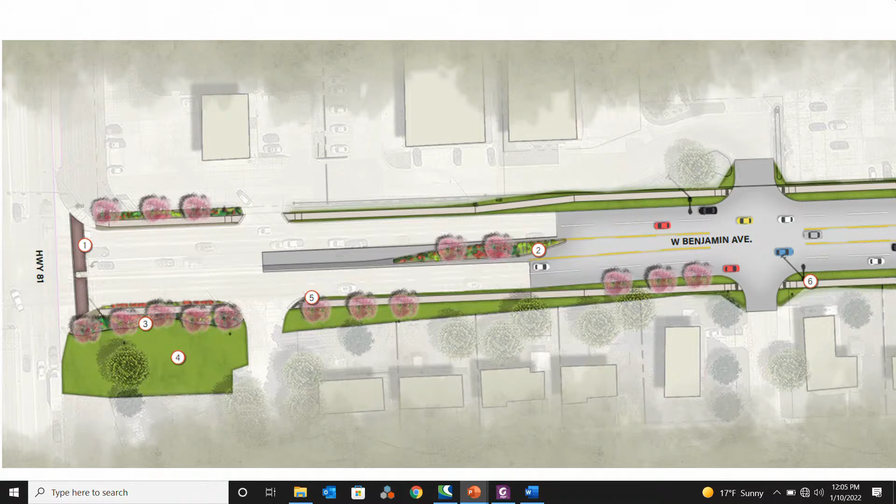So I've got about 4 images on the slides. Starting at the west end of the project, we're really focusing on about 4 areas throughout the corridor to what we call enhance the landscaping. Starting at 13th Street or Highway 81, we are looking to add some additional street trees in the area, identified by the pink color, as well as landscaping really the one raised median along the project where you can actually put some landscaping in it.

Moving east, we focused a little bit on the Queen City Boulevard area, adding some enhanced landscaping in that area, as well as some pedestrian lighting at the intersection of Queen City.

I'd say the majority of the focus of the landscaping is kind of in that area, primarily east of Riverside. It's areas where there are some large swaths of parking lot, and this will help to break up some of the large concrete areas within the project area.

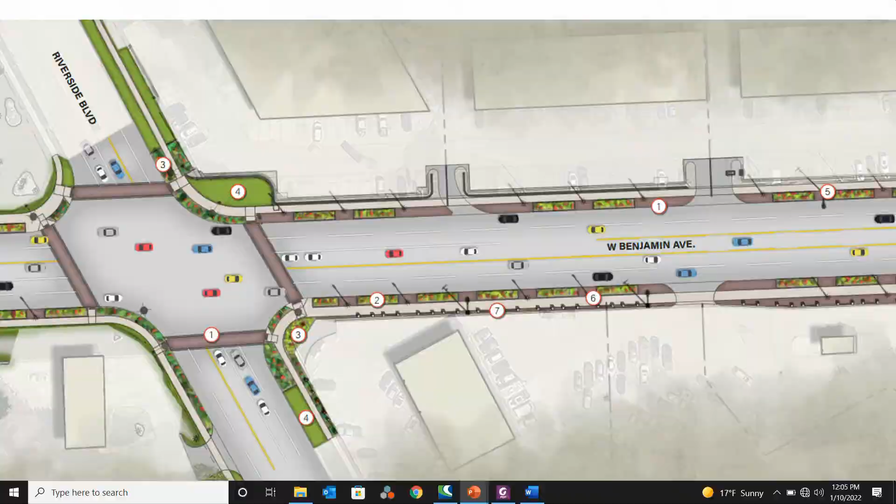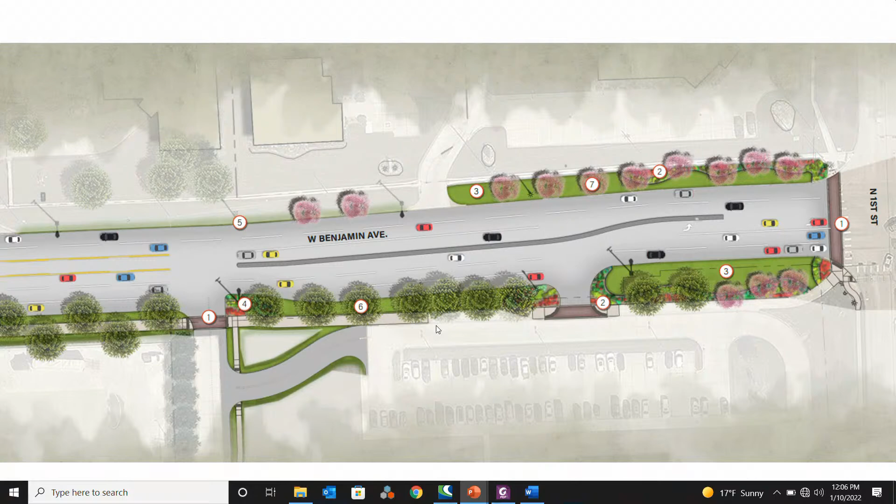I do have a rendering of this area shown here. This is kind of a graphic rendering of what this would look like when it's mature. There'd be some planter boxes, some pedestrian lighting, and some decorative concrete paving, kind of separating the street from the sidewalk. And then at the east end of the project towards First Street, we're also proposing to add some additional street trees, decorative trees in the area kind of in front of the YMCA as well as the school area.

As far as project status, where we're currently at, you've probably seen NPPD's been relocating their overhead out there. So those utility relocations will be continuing kind of over the winter months. As Steve indicated, the right-of-way is nearly complete. I think there's 3 parcels remaining. And then we're doing the final touches on the specs, specifically the dates that we're gonna put on the contractor as we move this thing forward.

I want to talk just briefly about construction phasing. This is a 2-year construction time frame, starting in '22, around April 1st is what we're predicting. Focusing west of Riverside in year 1, so really not impacting the intersection of Riverside in year 1. Year 2, so 2023, then we would do the intersection of Riverside on east to the east end of the project near First Street. Because of the Migratory Bird Act, there would need to be some trees removed prior to April 1 to adhere to that federal regulation.

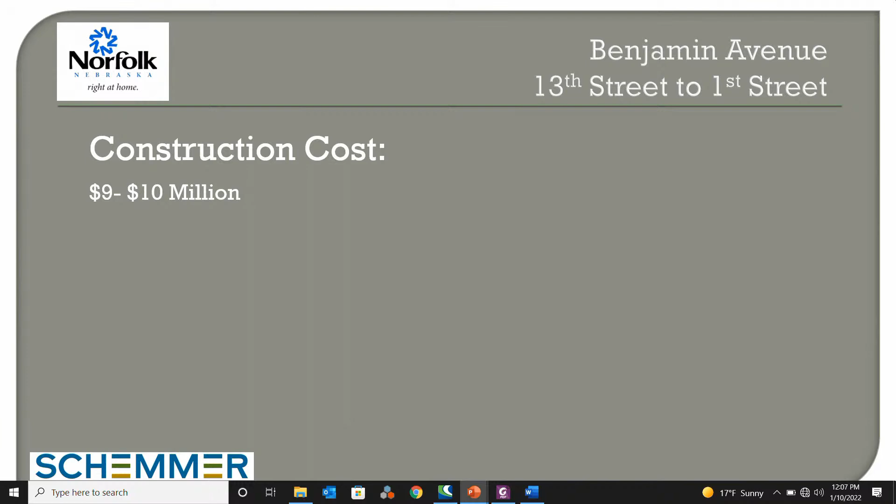Construction cost, we're estimating that $9 to $10 million range, all in with the construction cost. And got a question slide. We'll open it here shortly. I was gonna walk through graphically what the footprint of the project looks like for the group here, and then open it up to questions.

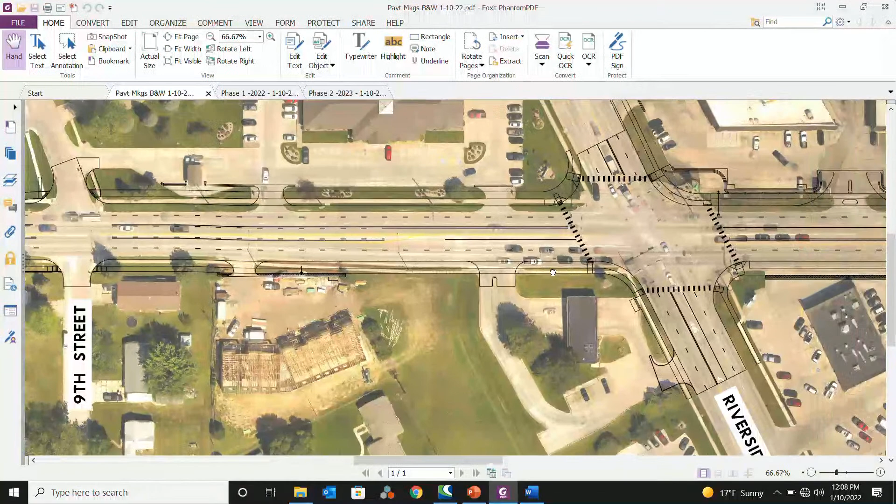So graphically, starting here at the west end at 13th Street, you can see what the pavement markings would end up looking like. It's basically a 2-way left turn lane throughout the corridor. We get to Riverside, there'll be some new crosswalks, a new traffic signal at Riverside. Continuing east, we are extending the box culvert under the old North Fork of the Elkhorn River and actually replacing the top of that culvert as well with this project, since cars are driving right on top of that structure today.

Once we get to the soccer field area, it'll be a full reconstruction on the south side, but on the north side of that area, right now we are just doing some pavement repairs. Those are kind of indicated by the rectangles on this graphic. The pavement in itself is not in terrible shape on the north side. So we're doing the pavement repairs for now in preparation for maybe a future asphalt overlay down the road.

At First Street, adding some crosswalks, updating some curb ramps, and supplementing the existing signal with some pedestrian push buttons and so forth. That's an overview of the design quickly, and I do have some slides that can talk about construction phasing during Q&A if we wanted to walk through some of that. So with that, I think we'll entertain questions.

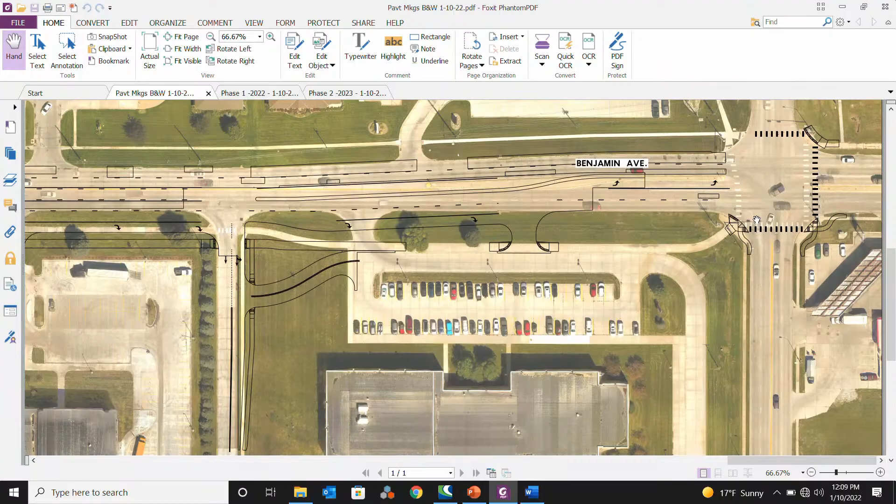When you're doing construction, you're gonna do head-to-head, one north and south, or south and then north the other way? Yeah, we will. I figured some questions would go to phasing. So this will be the 2022 construction stage. So 13th Street on the left here. As you can see, we're stopping short of Riverside with the red. So the red would indicate what's being under construction. Traffic would be shifted head-to-head to the north side of Benjamin, and then switch back prior to Riverside is what we're thinking right now. What's the green on Queen City?

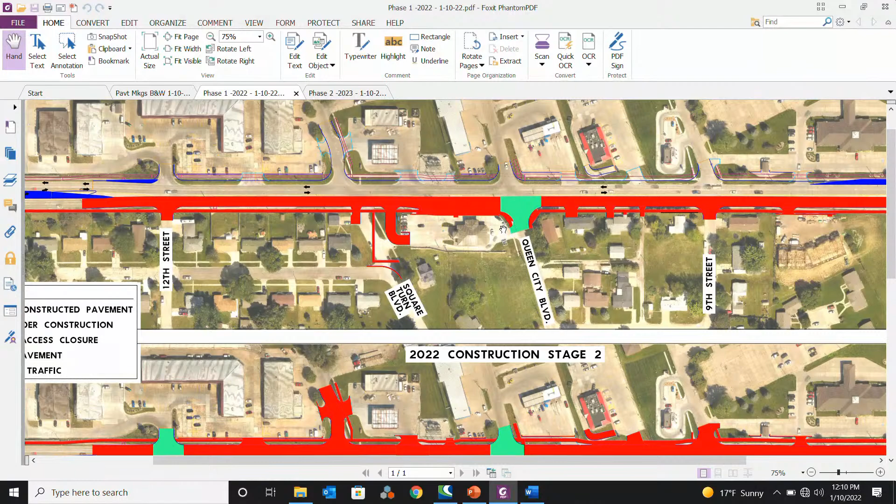The green is some areas where we're going to have to phase that intersection. So in this case, green means it would stay open temporarily while they get some of these other adjacent streets done. So for instance, get the new driveway to the pharmacy done. Once that's done, we could close Queen City and get Queen City constructed. So the green indicates kind of a phasing of that access.

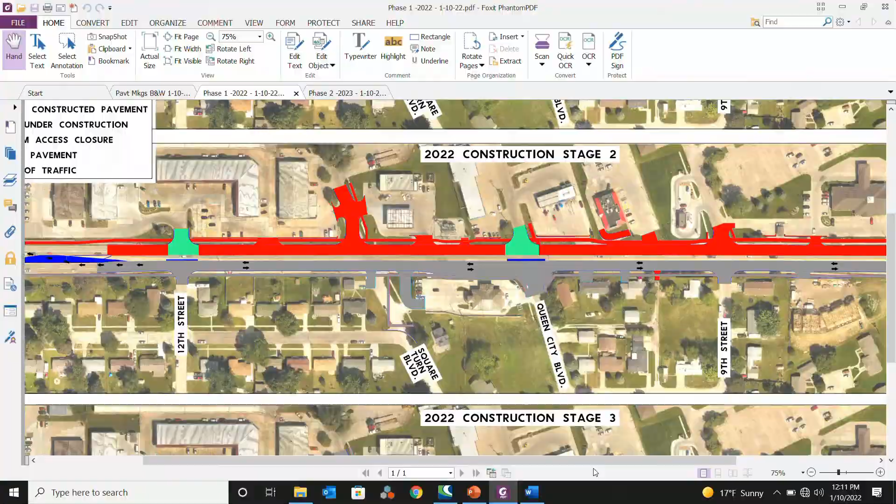On your landscaping, I know that's gonna be a separate entity, but have we talked about a budget for that? Are you looking for a landscape number? I think right now we're in kind of that $1 million range for the enhanced landscaping, which is the trees, the perennials, the pedestrian lighting, and some of the decorative concrete, the planter boxes. There is a little bit of a screening wall as well in parts of the project. Okay. And Steve, did we determine, is that the city's responsibility to maintain that?

That is the intention. I thought it was, I just want to make sure. Yeah, that conversation of the enhanced landscaping had come back to a conversation with subcommittee and some landscape folks, probably 6-8 months ago, and so that's one of the components we've been working on. And then as a function of that, we would intend to identify not just this corridor, but a couple other corridors in the community within city code as city maintained. Okay. And so that will come before us at a later date, and the idea there is either you would have some or you would not. Correct. Okay.

Doug, we saw with Braasch Avenue reconstruction recently completed here, beyond the street reconstruction, there was a lot of utility replacement under the street. I know we're dealing with some relocations here, but are we looking at, as part of this project, any utility replacements or major reconstruction of storm sewer or water? Yeah, so from a city utilities perspective, there is a fair amount of storm sewer being replaced on the project. There is a large storm sewer trunk line along predominantly the south side of Benjamin.

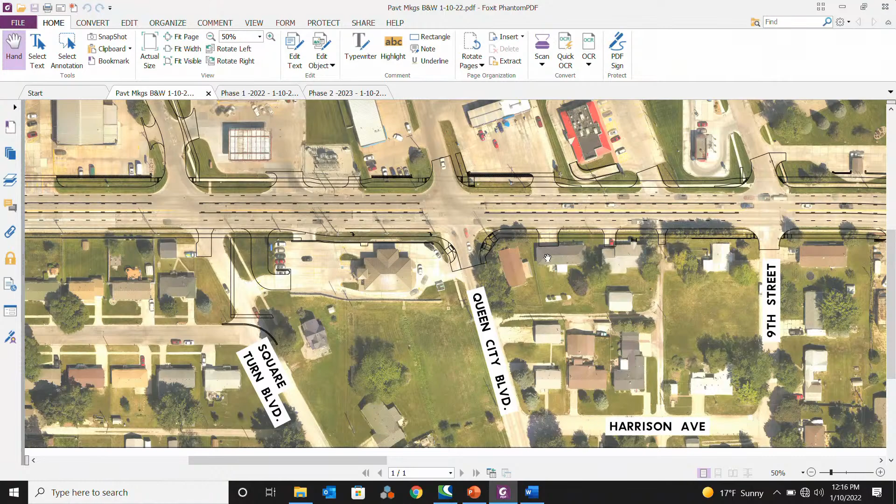On the box culvert, you extended that out on both sides, and now there'll be sidewalks across there? On both sides? That's correct. Any chance you could put a crosswalk in that area? Underneath or at grade? I don't know.

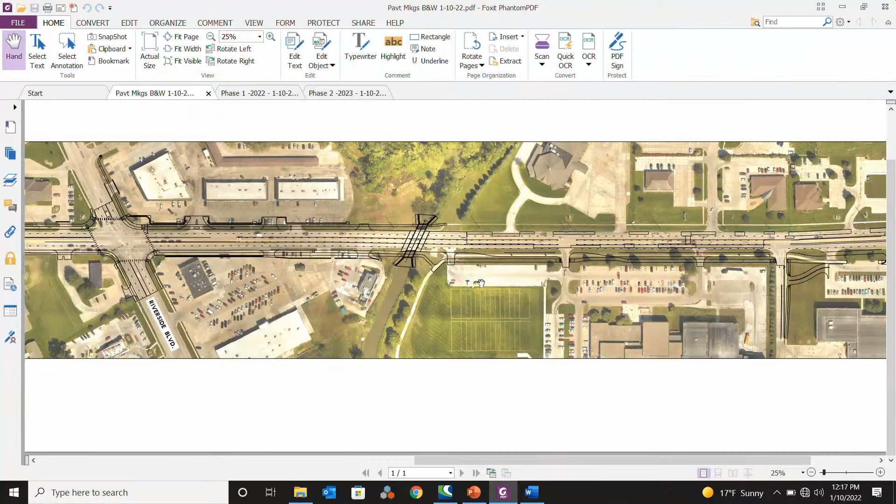I mean, I think there's always an opportunity to do that, based on the true volume of traffic on that stretch of Benjamin. I think we want to be very cautious about where and how many crossings we do for pedestrians, and really prefer them to cross at signalized intersections. The one thing, obviously, we will have some conduit in there just east of there for the potential of an RRFB, one of those rapid flashing beacon pedestrian controlled, in anticipation of increased river activity and kayaking, canoeing, potential crossings there.

Whether or not we actually do that installation at this time, we will be putting conduit in there to allow for something like an RRFB type pedestrian crossing. And that was designed, Steve, down towards the east end of the soccer fields there, was it not? Well, it would be, yeah.

Big picture, futuristically, we would anticipate the potential for an actual signalized intersection at the current YMCA entrance. Right. So in the design concept, we did look at that becoming a signalized intersection as traffic and pedestrian traffic started to warrant a signalized intersection there. That just depends on what happens at the YMCA, future development and demand at that area.

But in lieu of that being there as a signalized intersection with pedestrian crossings, having a crossing more directly east of that river bridge or the river culvert. We have crossing activity there right now, and so that is a potential, and we will be putting conduit in the ground there in anticipation of that RRFB type crossing there. Okay.

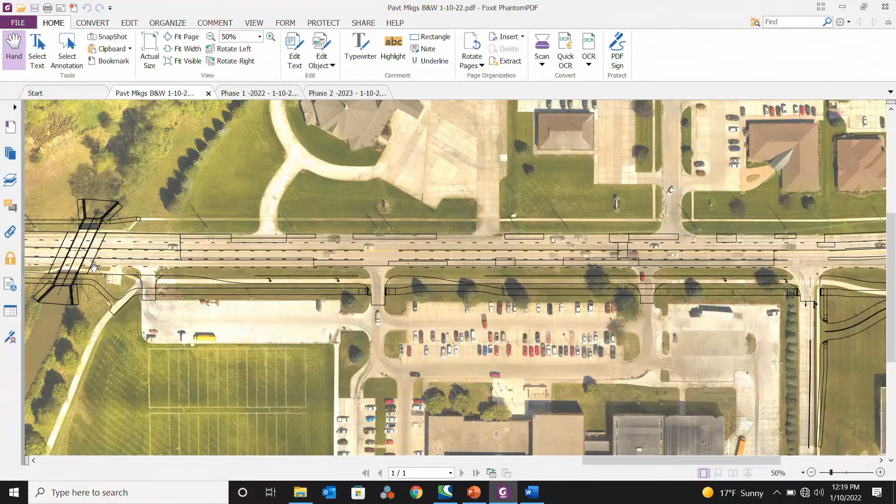Engineering-wise, things as they are, is it plausible to put a trail under the bridge? Right, a pedestrian trail. Yeah, right now it'd be a very shallow crossing. I don't have the exact headroom, but it would be a very shallow crossing for bicyclists to ride through there. Walking, maybe a little more feasible. Yeah, we don't have the headroom for a traditional bike-type crossing there. You want a minimum of 8 feet. It's recommended to have 10 feet of clearance, and we definitely don't have that.

So there will be a pedestrian crossing at Queen City, but that will not be signalized? That would not be signalized, correct. How does that work then? We'll add some pedestrian signs to sign it as you're approaching that. There's also crosswalks striped on that east leg of Queen City as well. We're only having the crossing on the east leg, not on the west leg, to really try to focus on one location for that crossing. So signage and the crosswalk pavement markings.

So with this whole project being wider, a little bigger than it is right now, is the speed limit going up, down, or remaining the same? Right now, we're projecting it to remain the same. Okay. We would definitely not be increasing its speed limit.

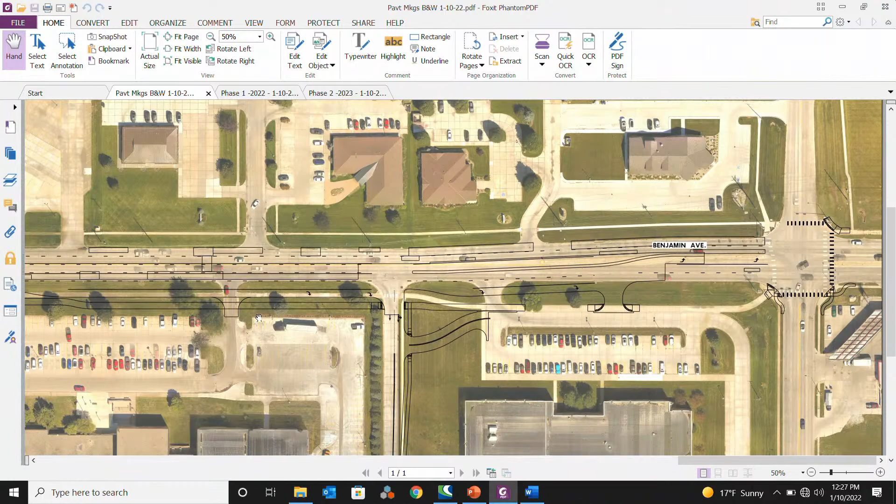North side of Benjamin across from Burger King. If you just pan over there, I just wanted to look at that quick. The entrance and exit going into the plaza, the multiple buildings on the north side of the road there. Right. My question is, why move it from the current entrance? This drive here? Yeah. Because we always want to align drives as much as possible when you have an opportunity for vehicles going eastbound or westbound to make a left turn. So by aligning them, you avoid that potential conflict of left turners turning into the opposite left turners.

In addition, that also aligns well for trucks or heavier vehicles to get in between Mr. Metalman's buildings as well. Was there consideration of doing only one access to that property rather than two? Those seem pretty close together. Yeah, originally this drive was proposed to be closed.

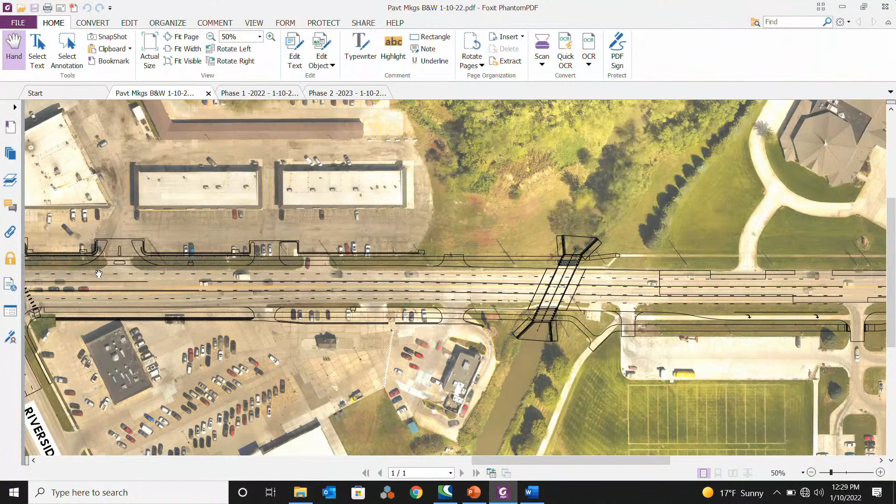There was concern about that from the property owner, and what we ended up doing is making that a right in, right out driveway to continue to provide access, but to eliminate some of the safety concerns we had about people, especially turning left out of there. That's where the majority of the crashes occur. It also helps with proximity to the traffic signal. Putting a full access drive there is definitely not recommended.

So there will be an island. There will be a kind of raised island both between the sidewalk and curb as well as behind the curb to really prevent a left turn out or a left turn into that drive. So Paul is all right with that? Mr. Metalman hasn't officially signed, but it sounds like we're pretty close on the right-of-way acquisition.

And the middle school, are they pleased with that concept? The middle school has signed, so to me, that's an indicator that they are on board with this. We did have multiple meetings with them throughout the project. Right. Thanks. All right, any other questions, council?

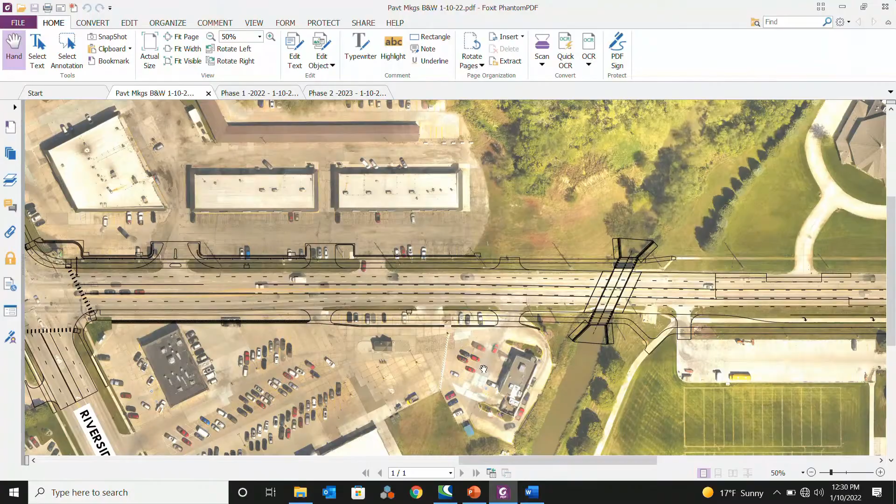I guess I just have a comment. This is a big project for us. We've been waiting a long time for this. But as we go through this process to start the actual construction of it, the big thing is gonna be communication with the businesses, the homeowners, and the citizens through the city website, through the newspaper, the radios, where we're at, what we're doing.

I just think, as a team, we need to all be on the same page, for everybody's safety, and then for the communication for people to get around the community. It's gonna be during different times of the year, schools and holidays and festivals and different things, so that people know that we're still open for business, but we'll do the best we can. And everybody's gonna be patient, because once this project is done, it's gonna be a nice investment for our community.

Well said, Councilman. And maybe that is a good segue into talking about some of the timing here. So with this action, should the council take it, we would authorize going to bid on construction. And Steve, maybe you can talk about what that means in terms of timing. When would the bid actually be let? When would we expect closing of it? And then potential construction? You have the advertising right there.

So we will be advertising this until February 17th. Put it on the bottom for me, Doug. First advertisement would hit the paper on January 20th. Last advertisement would be February 10th. Right. And go back up. There's about a week's delay in there, 2 weeks delay. We open up bids on the 17th.

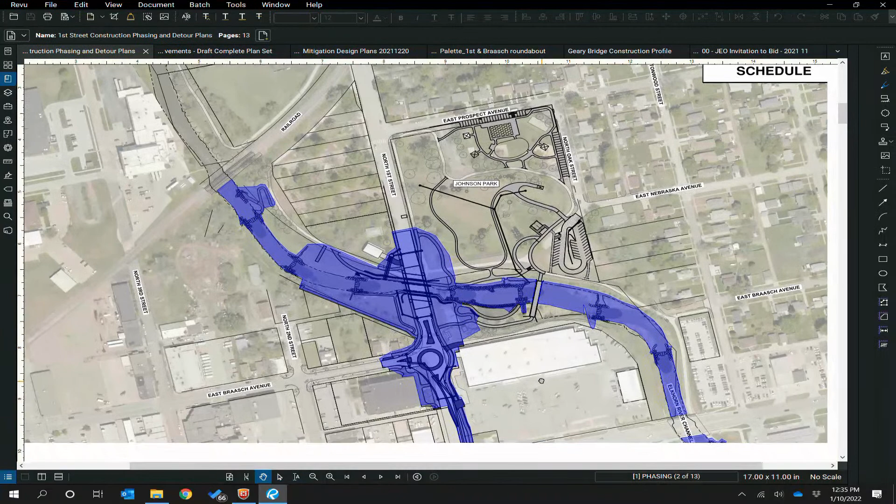The second component of the project is the replacement of the First Street Bridge across the North Fork River. As a function of that, there'll be sidewalks underneath First Street on both the north and south side of the river. So you'll be able to enjoy the trail system and cross over there without conflicting with northbound and southbound First Street traffic. Finally, the third component is some significant drainage improvements in the roundabout there at Braasch and First.

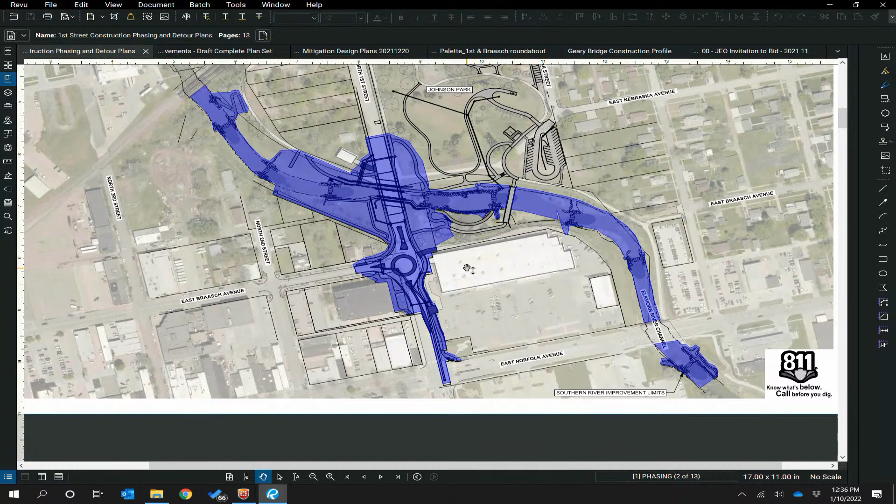And the drainage, we did a significant drainage improvement on Braasch from 4th or 5th to 1st, back when we built that a couple of years ago. But knowing that we had this work that was gonna go on, we terminated that at the west side of First Street, so we'll be extending that storm sewer system down to Norfolk Avenue and then constructing the roundabout. So those are the three components, and with that, I'll turn it over to Nathan to kind of walk you through. Sure, thank you, Stephen.

All right, so I am going to go one slide back. The reason for that is Stephen did a really good job of encapsulating all of the three various projects that are wrapped into this one that we're here primarily for discussion today. I do want to point out there are multiple other projects in this vicinity. So while this project involves those three, it's also setting the stage for future work that is planned within Johnson Park, whether it's the parking lot improvements, the restroom, grading, sidewalks, as well as future amenities, as you'll see in the green in Project 4, which would be for an amphitheater, skating rink, various amenities that the community can use for years to come.

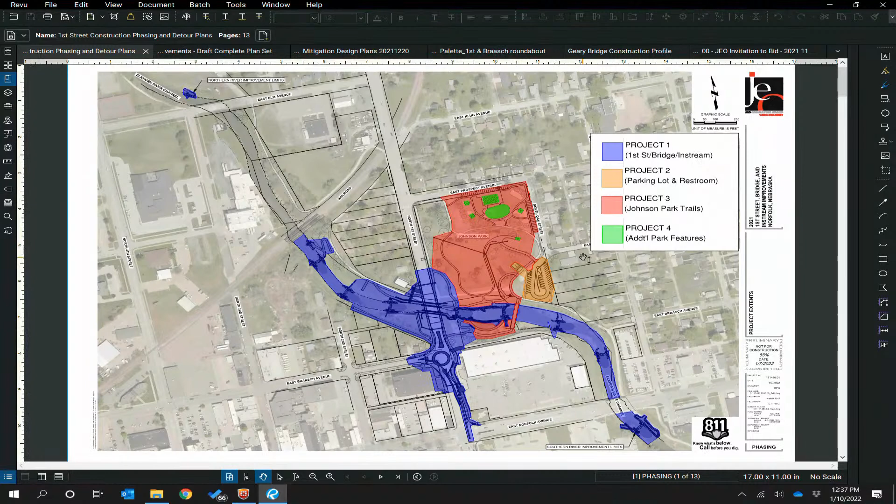So this is the only snapshot I have of all of the projects together, but you can see how they all intertwine as one massive improvement project over the next few years. So I advance to the next page. Everything in blue is really what we're talking about to be approved for advertisement today. We're calling this project 1, and within this project I'm gonna explain it in multiple phases. So phase 1, 2 through 3, if you will.

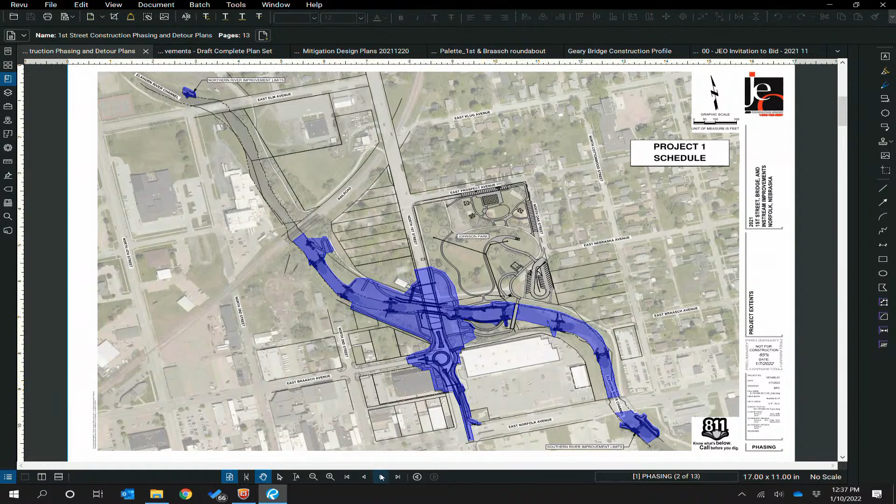Now you may ask, well, the stream or the channel is right there. Why don't we just pop in? It's a lot shorter. It'd be a lot cheaper, more cost effective. Well, we certainly looked at that, but because of the stream improvements and the water elevation within that, where the storm sewer is, it really doesn't work. The storm sewer is approximately 12 feet below the street surface as it exists today. The stream is not. It's considerably higher than that. So we'd have to put a pump in, a significant cost and maintenance effort, in order to get the storm sewer out. So we identified a really good tie-in point on East Norfolk Avenue in order to extend that. And we're going to break that up into a couple phases so we can keep Norfolk Avenue open during construction.

As well, the other item that's going to start in May, really as soon as we get notice to proceed, is removing this bridge structure. The reason this is a very critical item is that's the longest lead time of everything that we're working on here. And the reason we need to get that going first is because by the time that is removed and the contractor's done with that removal and all the structure that supports it, the stream work will be up to that point. And so we can kind of hand off from one subcontractor to another throughout this contract in order to move forward. So this is May through June of 2022.

But overall, from a schedule standpoint, Norfolk Avenue, as I mentioned, 14 calendar days for each of the subphases within that, and I'll go into detail on what the traffic plan looks like and how we plan to redirect traffic. For First and Braasch, we have the roundabout and all streets fully open to traffic as of November 1st. That's the goal we're telling the contractor. Trails and sidewalks, we want fully open December 1st of this year as well.

We do have the contract continuing on through May 31st of next year. And really that's to button up some of the seeding, the vegetation, things like that. As we get into the winter months, it just becomes too cold to put those plants and seed down and expect them to thrive throughout the winter. So final punch list items. So overall, the cost of all of this, everything that I've showed you in the blue, as well as these multiple colors here, is between $7 and $8 million for construction.

So now I can dive into a little more detail for some of these areas. So phase one, as I mentioned, is this bridge replacement. So construction duration for this segment is 6 months. So late April, early May to early November is what we're anticipating for that.

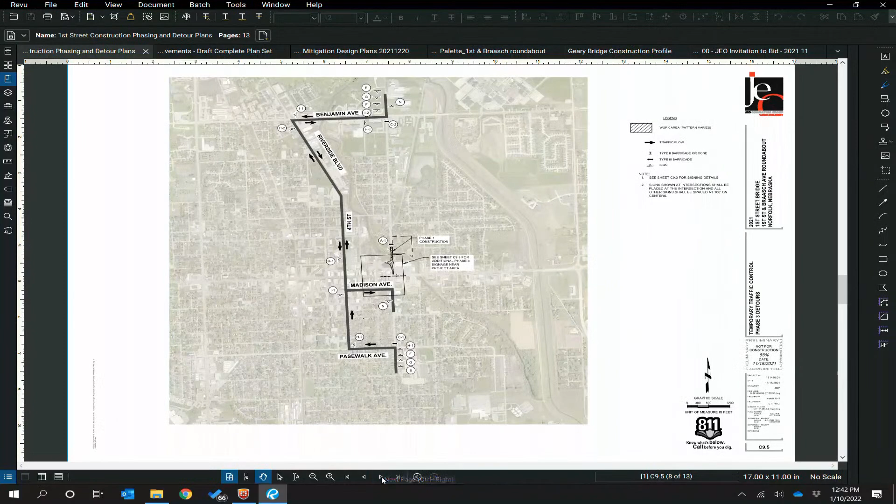And then phase 2A and 2B, this is along Norfolk Ave, storm sewer replacement, construction duration of approximately a month, so 14 days per subphase. Anticipating as soon as the contract is signed, so late April, early May through June. So this is the detour for this phase. And this is really a driver in that First Street would be fully closed in order to allow for that bridge to be removed.

So as Doug mentioned, Benjamin Avenue phase 1 for 2022 is everything west of Riverside. And the reason for that is because we really need Benjamin Avenue open east and uninhibited to allow for the detour for this project.

So detours northbound will begin on First Street, then go west on Pasewalk, then north on 4th Street to Riverside, and then to Benjamin east before continuing north again on First Street. Southbound, again, most of that in reverse, so First Street to Benjamin, to Riverside, to 4th Street, and then instead of getting to Pasewalk, we have them going to Madison Avenue. And the reason for that is to keep as much traffic as we can off of Norfolk Ave with the pedestrian numbers that are there, as well as parking, and it made more sense to redirect traffic elsewhere.

Now the locals, everyone who understands where all the street system is, they're gonna go wherever they wanna go regardless of how we sign it. So that's something that we'll have to keep in mind throughout the project to make sure we communicate with the contractor and with really just the community as a whole of this is the established detour route. But a lot of locals tend to find the route that works best for them in their situation.

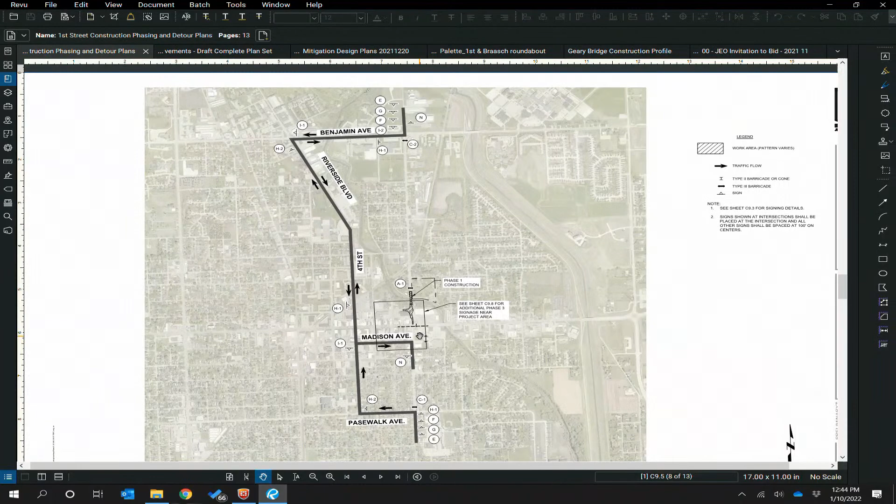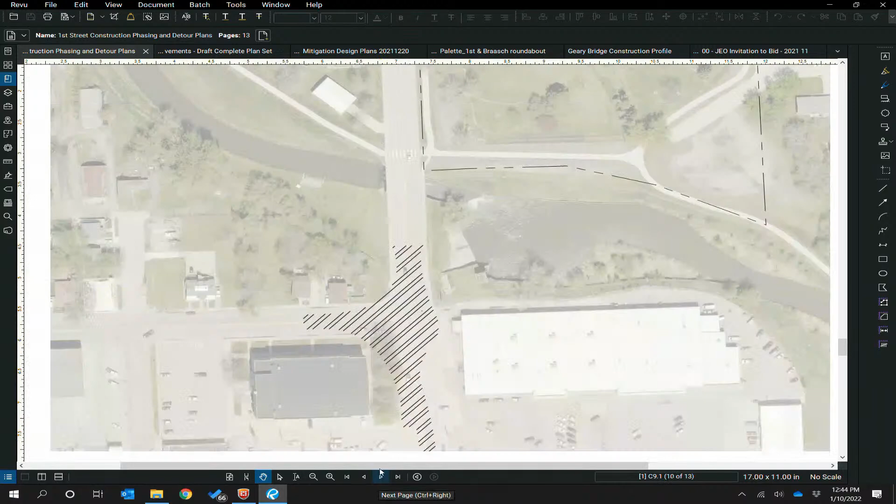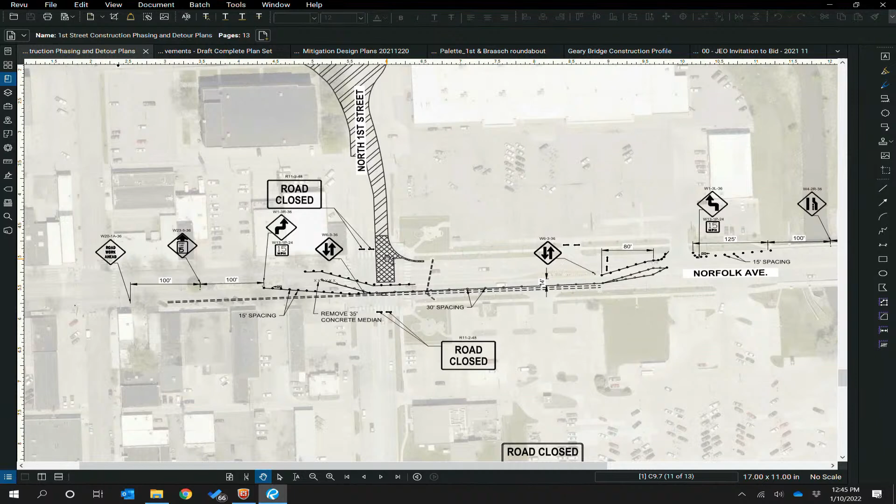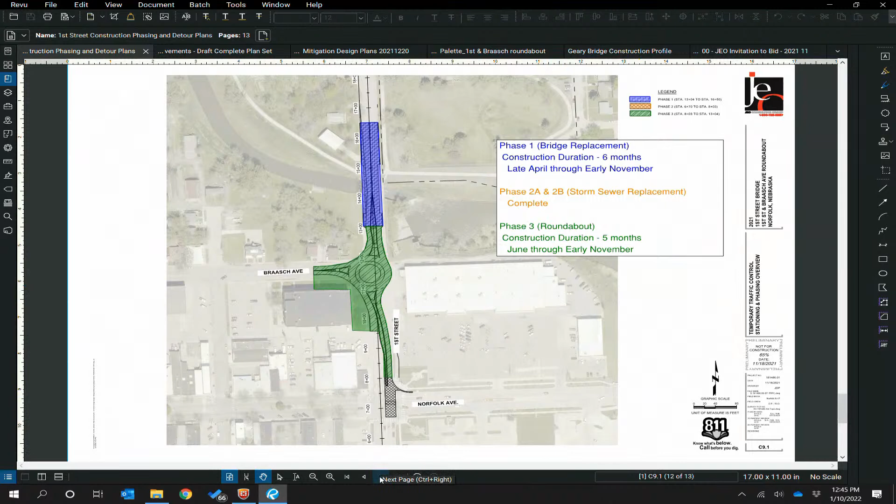Quickly switch to the other side. We would divert traffic to the eastbound lanes and work on the north side of that intersection. And then once that is complete, Norfolk Avenue is completely open again. And the work will continue on to phase 3 of this project, which is the roundabout. So construction duration, we're estimating 5 months, so June through early November. And then again, the bridge work will continue moving forward throughout this entire process.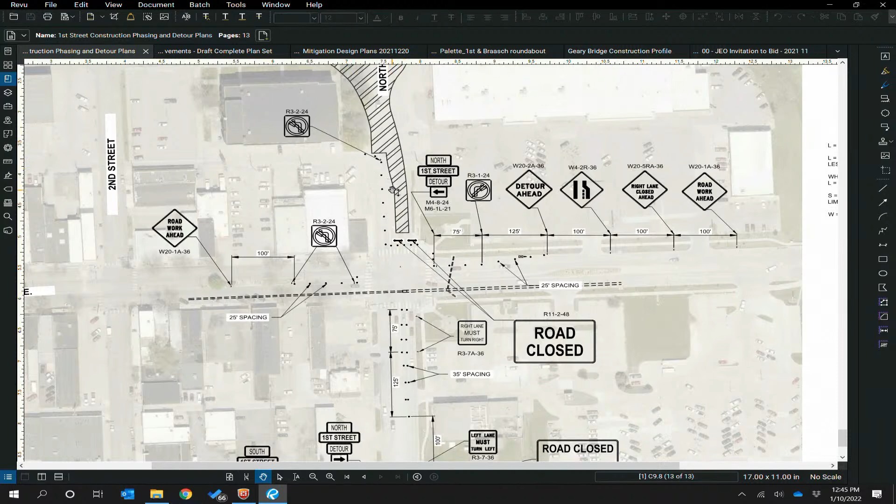And again, this is what it would look like when Norfolk Avenue is complete. So there'd be no northbound movements north of Norfolk Avenue. Everybody would be instructed to turn right to go eastbound, or they would make a left turn to go westbound. We would maintain alley access from 2nd to 1st Street, but it would be a right turn only to go southbound on that. And we would close Braasch Avenue down between the parking lot and 1st Street.

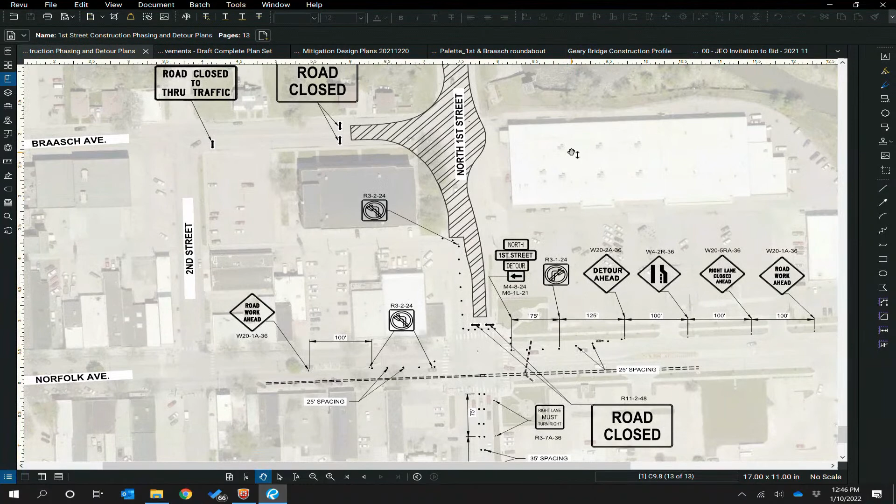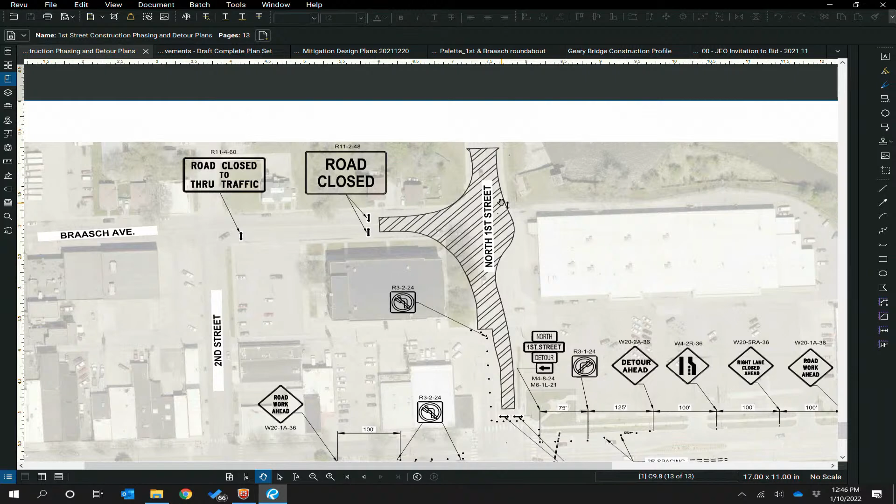So access would be maintained for the properties within this area. We would certainly plan to work with the homeowners, both on the south side of the channel as well as the north side, and through right-of-way negotiations. We've certainly been having those conversations. There are 4 pieces of right-of-way that are in the process or nearing final acquisition. So the YMCA, part of a residential property, a couple of residential properties, and then some sliver on the east side of 1st Street.

Let's see, a couple other pieces that are going to be going on with this. So because of the stream work that's going on, we will need to provide some wetland mitigation. So on the north side of town, between Benjamin and 1st Street is actually going to be a wetland mitigation site. The original plan was to put this along the stream directly within the project area. It's not the most ideal, both from a construction standpoint as well as a mitigation site standpoint. Certainly doable, but it makes more sense to get it to a totally dedicated area. And this is the area we identified that you can see in green.

We're currently working with the Corps to file an adjustment. So we do have approval for mitigation work to date, so we can move the project forward. But we want to inform them that, hey, this is where we're planning to adjust the site to. We're going to stick with everything else they requested, and then we should be able to move forward without any hurdles.

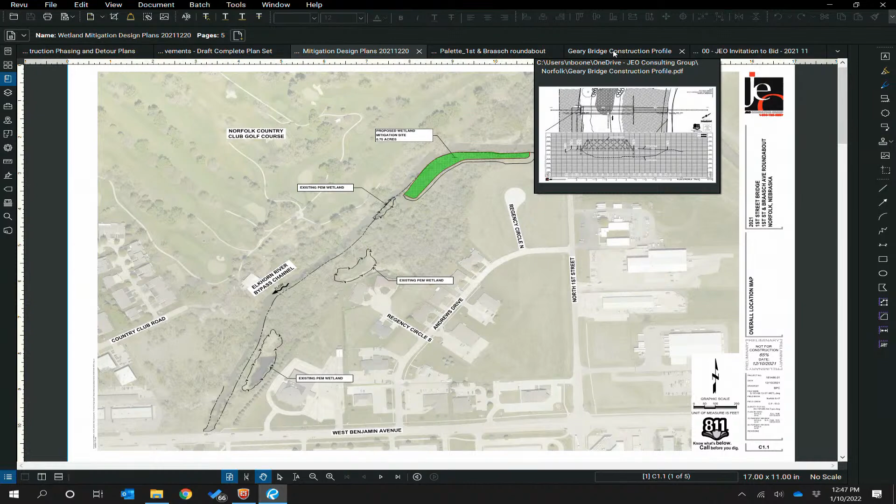Also a part of this project that's not necessarily part of the bid, but as far as some coordination effort, is certainly the Geary Bridge. So as Stephen mentioned, the existing truss structure to the west of 1st Street is something that will move further east. So this project itself will move some earthwork and create some abutments. So it'll create the approaches for that structure.

And part of the coordination effort through all of this construction is for the Gearys and their contractors, or that entity, to actually move the bridge east along the river during the construction process. So we'll be supporting that through earthwork, and then their contractors will work on the pilings as well as some backfill, putting the structure in place. That'll all be done by them, but certainly all in coordination.

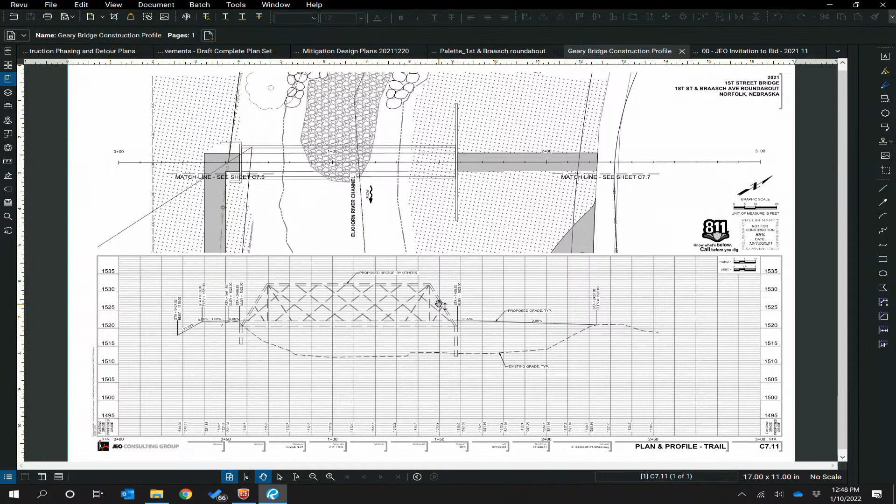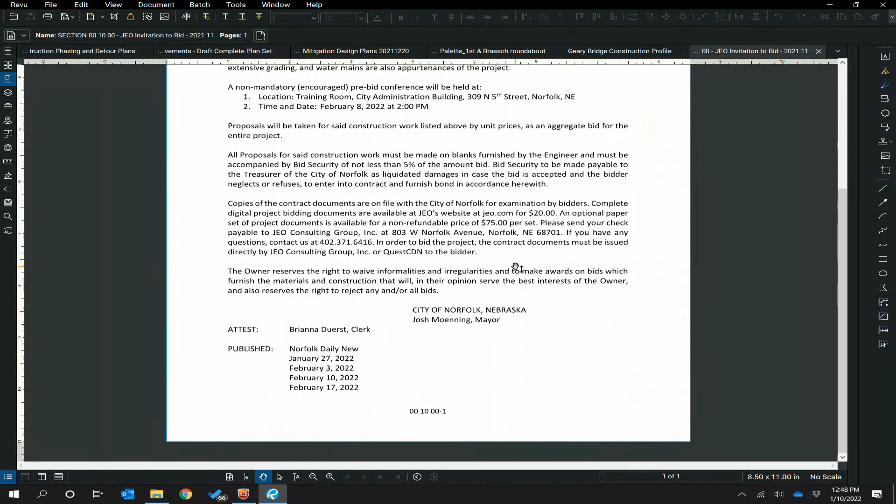As far as schedule, looking at the invitation to bid, with approval to advertise today, we would be really a week behind where Doug and the Benjamin Avenue project is. We would start advertising January 27th, as well as throughout the month of February. And we would have a bid opening February 24th, and then also be on the March 7th council agenda for award of that project. So you'll see both projects together hand in hand.

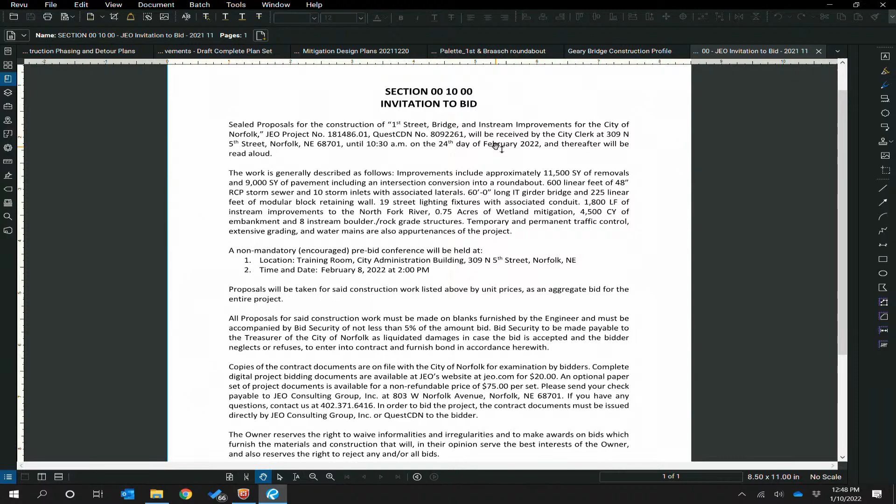With that, I will open it up for conversation. How deep will that river be in the new areas? What's that? How deep will it be? And how do you maintain that depth without the spillway? I know there's a way to do it. I just got asked this question. I didn't know the answer.

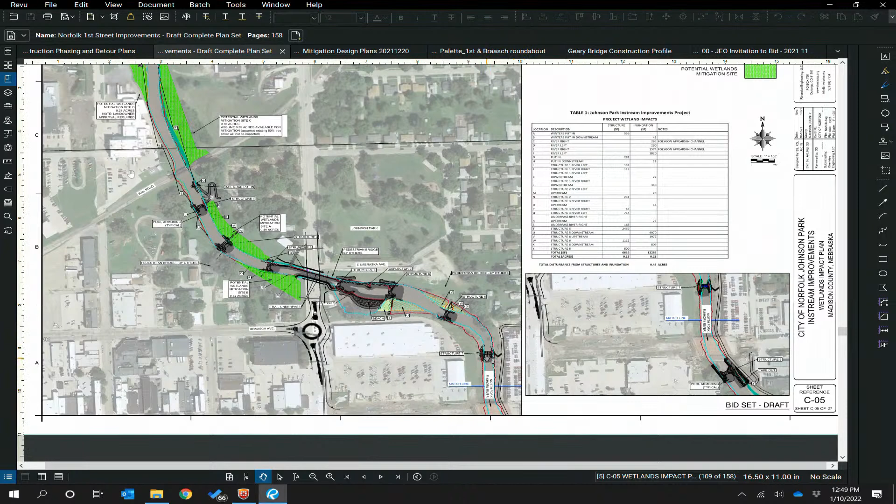So throughout the stream work, these various drop structures will go in. Let me see if I can find one that gives a little more detail and can help answer this question. I explained it by stepping down, and they didn't understand that. Yeah, so it's basically some really long steps, if you look at that entire stream as a set of steps. Step 1 is really from south of Norfolk Ave up to the north side of Norfolk Ave. Step 2 is basically from this structure up to the next one, and then it subsequently continues further upstream.

So going over those steps, is it like a shallow rapid? It is, yep, because it's a whitewater park. It's funneled into a specific area, so there's 3 flow levels that have been analyzed and calculated as part of the analysis effort. Those 3 levels determine the depth of the water, as well as how it goes through each of these structures. Drop structures is what they're called. And depending on the competition or the recreation level, those flow levels can be fluctuated and managed by the city.

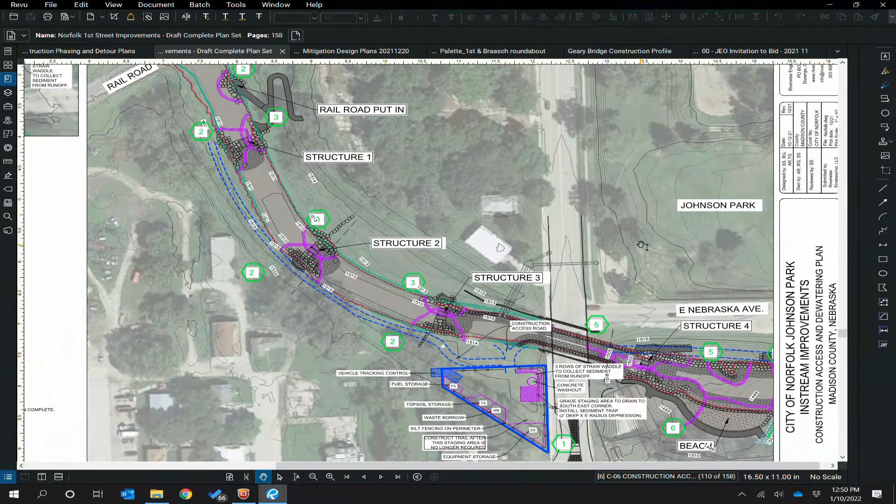When you go to take out the existing gates, if we do have a large amount of moisture during that time, will we have some downstream flooding, or will these structures take care of some of that? Because of the bypass that's in place, this does not function as a flood structure whatsoever. It's purely there for recreation and use. Now, if there's immediate needs within the basins that flow into this, then yes, this will handle that flow. So as a whole, it won't operate any differently than it does today.

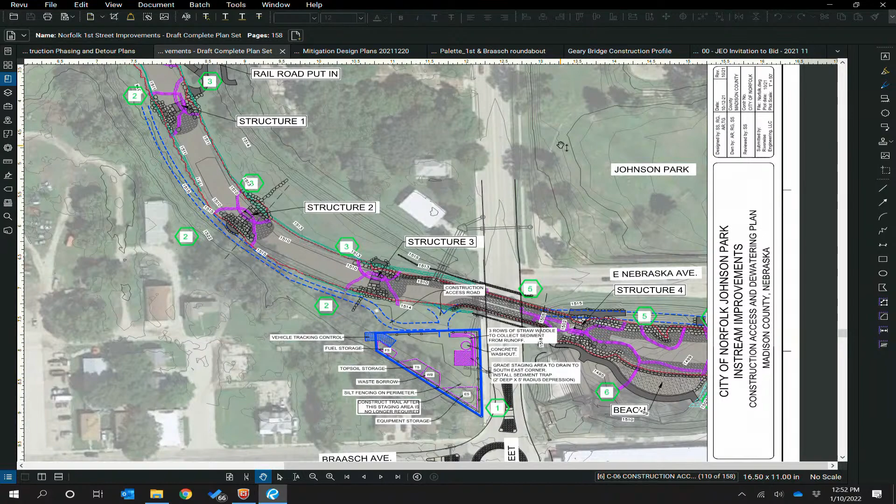I mean, during the construction part of it, are they gonna shut down the spillway up there? So during construction, the water level at the gates will be closed off. I think I see what you're saying now. So those will be closed off, and if there's a big storm, yes, this will receive flow from that storm. We've laid that language out within our project document so the contractor is aware of that. While the water can be closed off or controlled, during rain events they'll have to de-water, pump the water out, if that occurs. Okay. So that's the risk of working within a river channel, for sure. That's just one of the questions I was asked.

Will these in-stream structures need any type of maintenance at all? Steve, I don't know if you've had a chance to talk with Shane. The idea is that they function in perpetuity. There really is not a whole lot of maintenance that needs to go into them. The boulders are sized such that they'll stay in place. They won't move around like a natural bed with boulders, which after a big flood event will look very different than before. Because this is a very controlled environment and they're sized and weighted appropriately, the maintenance should be very minimal. I don't know if there's anything you want to add, Stephen.

Yeah, I would say I see no real maintenance to it. Obviously, to the extent there are pedestrian ingress and egress points, if there's damage caused by pedestrians or something like that, there would have to be some maintenance, if somebody goes in there with a chisel or hammer or axe and starts banging on things. But just from a normal river flow perspective, I don't see any long-term maintenance.

So we are at risk as a community in an event like that. If we were to get a 6-inch rain within the city, we would fill up the North Fork River. And we did see a little bit of that. I think people that live along there would attest that the water level started to fill up, and all the way up into Johnson Park here at this bridge, that water level was probably 6 to 8 feet higher than it normally is. So we're always at that risk. This project has no impact on that risk.

But Steve, in that situation, we didn't incur really any flooding or property damage within the North Fork corridor. We were not. The Nucor Detailing Center was probably the most at risk in that 2019 event. We had brought pumps in all the way from Indiana to be able to control that.

Would we say that this bridge should help flow water better than the box culvert bridges? Or is it the same because it's the same type of volume? I don't know. It looks wider. You're going to have more of an unobstructed flow, so we're not going to have the turbulence that we have directly downstream of First Street right now as a function of that large flume. So from that perspective, I would say you're going to see a more consistent laminar flow throughout the system.

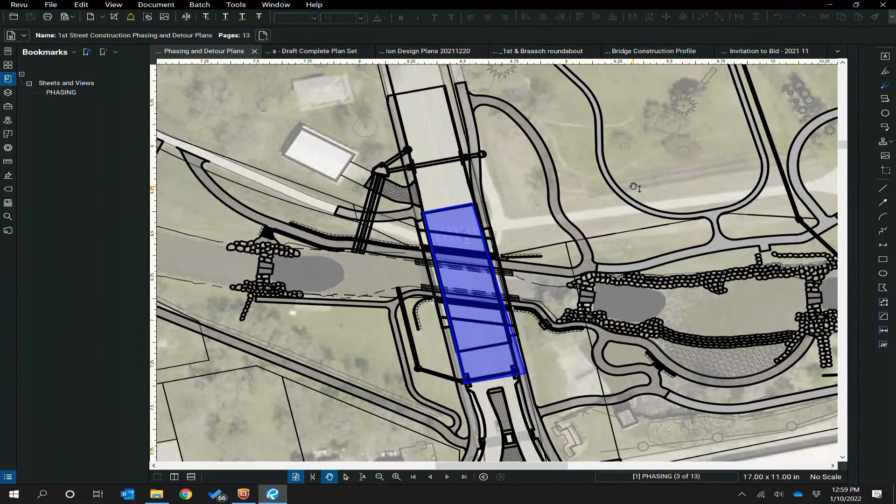I know one of the conversations throughout planning for this project was returning the river to its more natural course, and removing the spillway should greatly enhance the fish habitat and fishing opportunities. Within each of these 8 structures, on the south side, it's a little bit hard to see, but on the south side of each of these structures, there's a fish channel that runs through there.

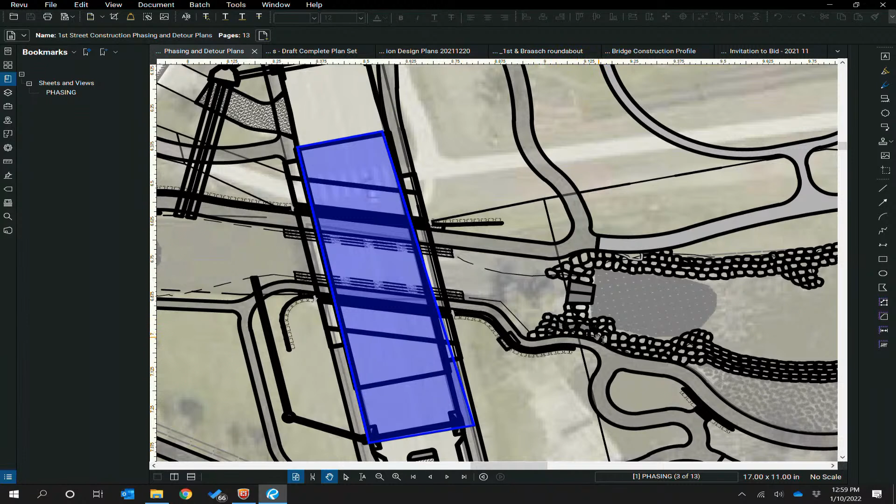I can see it here in these 3 areas. Bring your hand down a little bit, Nathan. So that right there is a fish channel that runs through. On either side of that channel is a rock wall. And so the ability for aquatic species to move up and down the system is greatly enhanced with this project.

What about that current, I guess if you want to call it the gatehouse or whatever that might be, that's right on the corner? What's our plans with that and the current gates that are there? The gates will be relocated to a location unknown; that's yet to be determined on exactly what that will look like. That's the existing gates. The gatehouse, the plan is to leave the gatehouse there.

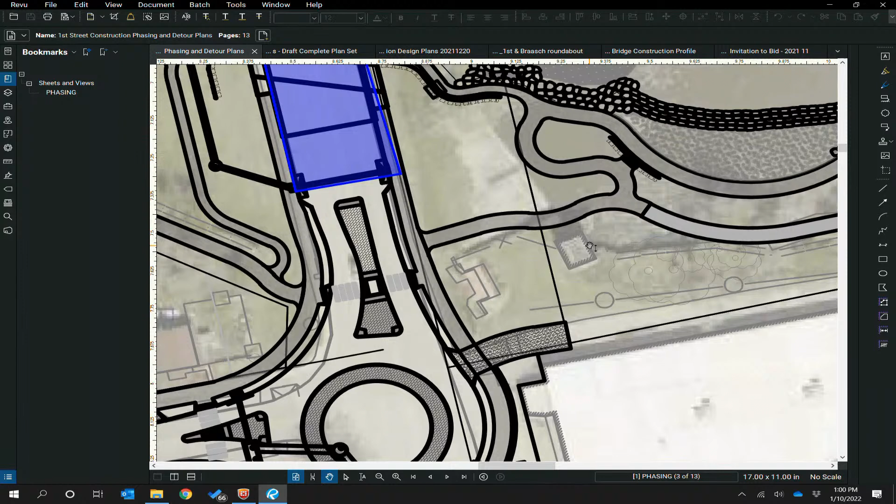That could be like a visitor's information kiosk. There might be an ability to do some retail component out of there. An observation deck to look out over the river, but we've had several conversations around exactly what that might look like. I don't believe there's any dollars in phase one. I don't think phase one addresses anything there, so that would be addressed as a function of phase two or phase three. That also has been part of the conversation.

This project's important in my mind in that it goes back to the history of this community. This is where Norfolk started, and given where that gatehouse is, and it remains one of the few historical markers of this area, I think it's important to have it remain intact and, in fact, utilize it as a space to help tell the story of this area and the community's birth.

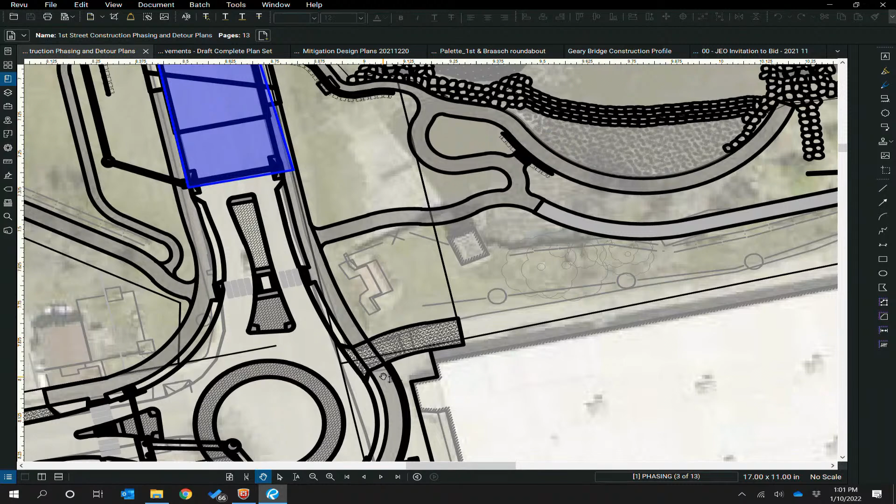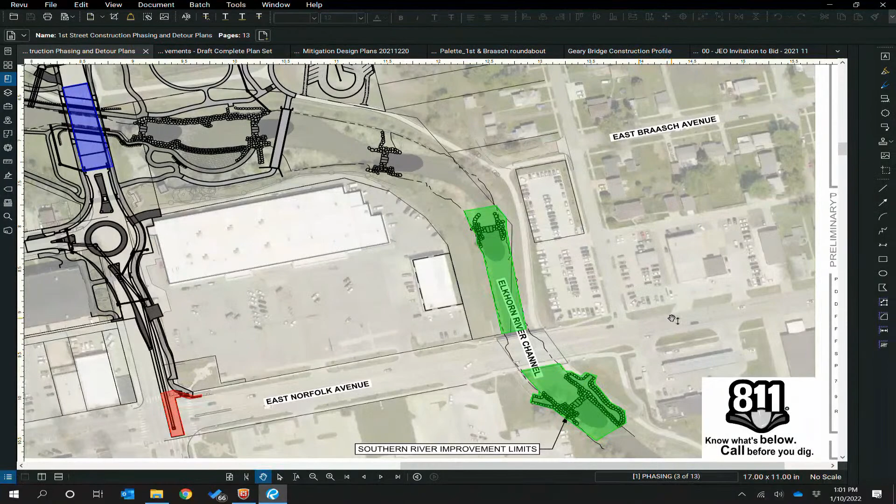Scroll down, or scroll up, I'm sorry. On that, how close is that roadway to that YMCA building? Let me see if I can measure it. Wider than it seems. I believe it's 16 feet. I think it's even more than that. Could even be more than that.

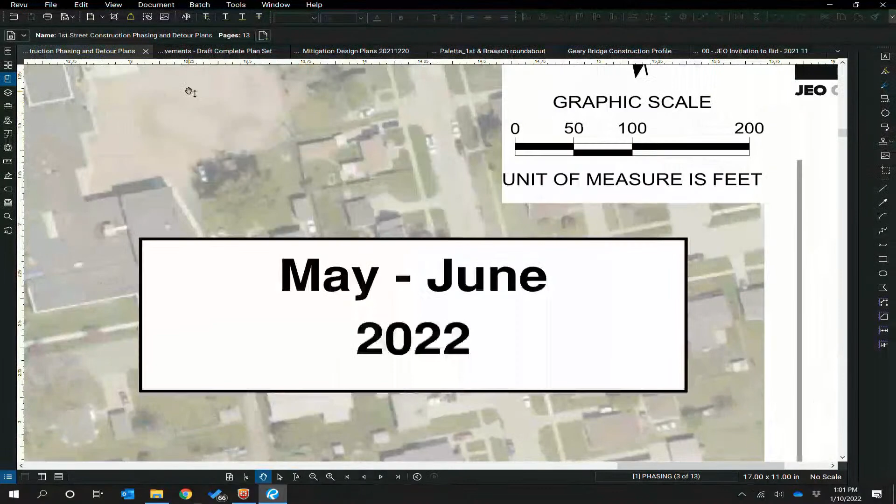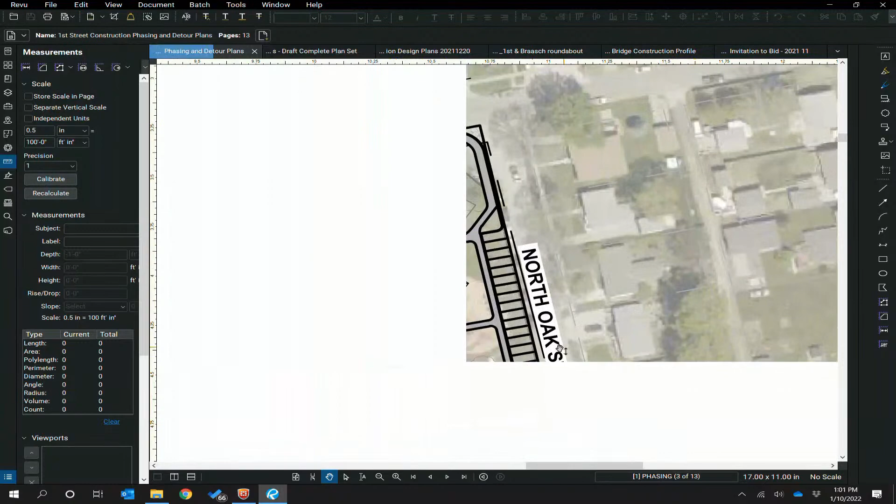As a function of the conversations with the YMCA on that, we're gonna take that seat wall concept that we have on Johnson Park, and right in that narrowest area up there in that northeast corner, we'll put a seat wall right up against the sidewalk along there, just to provide a little bit of additional protection up in that area. Yeah, I can draw exactly where it is. It's really hard to tell on this, but we'll be putting a seat wall roughly right in here. And how high is that? Similar to what's on Braasch, so probably 24 inches or so. Yeah.

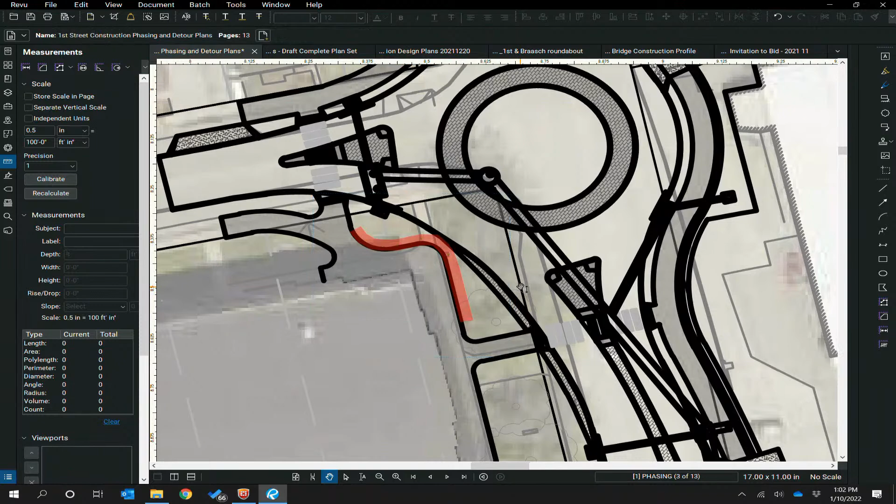Since we're talking about this right by the roundabout, we're hearing, at least I am, I assume others are too, an astounding amount of people not in favor of the roundabout. So I think it's worth discussing whether that should be a part of this project, shouldn't be a part of this project, should stay 4-lane and not reduce to 2-lane for roundabout and back out to 4-lane. So I think that'd be a good discussion for us to have.

I personally feel that, and you guys have heard this from me before, that should stay 4-lane and not be a roundabout. And I'll be honest, that's what I constantly hear from the public too. So that's the part of this project I probably have the biggest grief with. Everything else I definitely can follow along with, but I think it's worth us discussing this a little bit further and where we go from here on this. So you're saying don't put those up for bid?

I'm saying, me personally, I cannot necessarily support this being a roundabout the way it is. I could support it going to bid without a roundabout in it. I could support it as being a straight 4-lane and not doing all of this at this area, definitely. But I think it's worth some discussion. I'm not here to tell people which way to vote, but the way I see it, there's support in the rest of this, in all of the phases through Johnson's Park and the river, but I think this is the one that stands out as being an issue of this whole design.

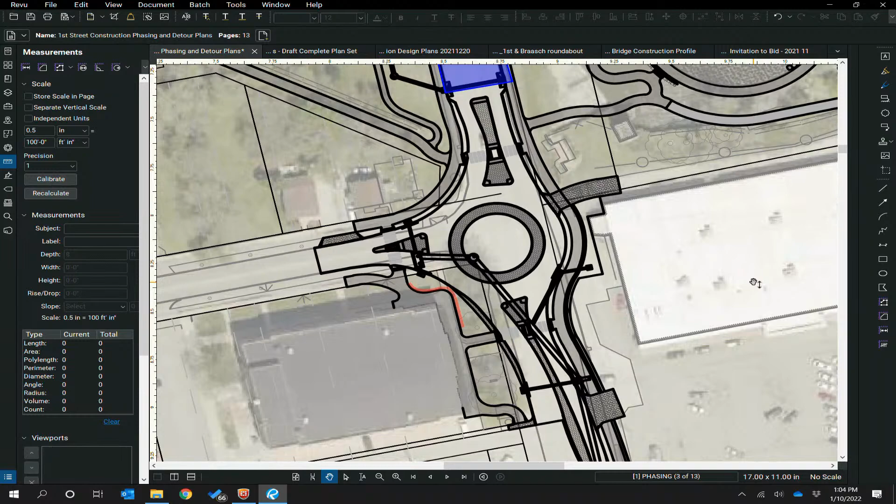I think there's been a lot of discussion on it, and I think the point of the roundabout and taking it from 4 lanes to 2 lanes is to slow down traffic, because people don't slow down up there. If you left it 4-lane, it isn't gonna slow down. And if we want projects or things to go on in that park where people are walking around, that's not a good area to have them flying through. And it's only a few blocks that you're talking about. Yeah, but they can actually cross under the bridge in 2 spots.

So I guess with that being said, can you go through with phase 1, phase 2A and 2B, and hold off on phase 3 right now? I guess, you know, I wasn't necessarily prepared for that question, but I know over the last 2 or 3 years as we've been in design on this, that conversation has been brought in for either full city council conversation and vote or subcommittee, at least 3 times. And so, I think

that conversation has occurred. I was going to note that too. I mean, these are public discussions, always open for full and open debate on these things. But just looking at the history, this roundabout proposal is nothing new. This came in planning for the Braasch reconstruction project. It was part of that project. It was approved as part of that project, but this part of it was held off, knowing that we potentially were going to do the bridge replacement work and everything else in conjunction with Johnson Park and First Street.

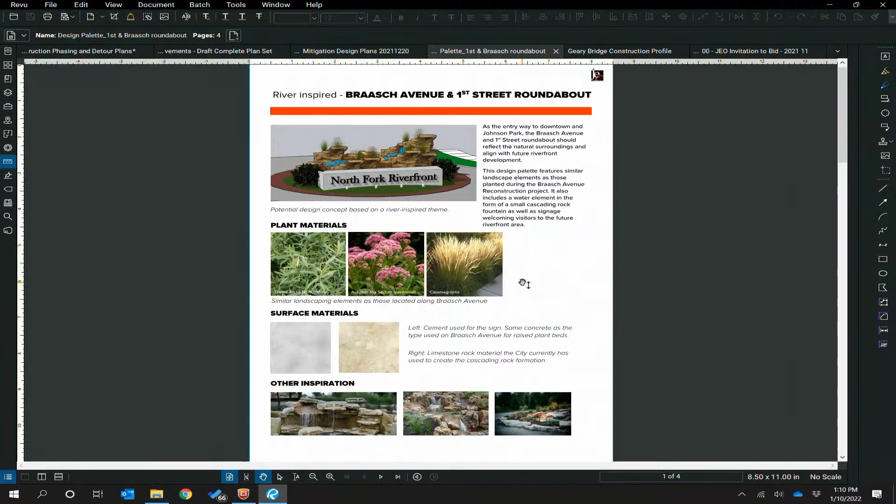Nathan, if you could, as a function of the conversation, I think I saw you quickly blip at some general concepts. The way the project is set up in terms of landscaping, we have a landscape allowance that will be included in the bid documents. And they will provide this as some guidance to the low bidder. Just show the 1, 2, 3 concepts if you could there.

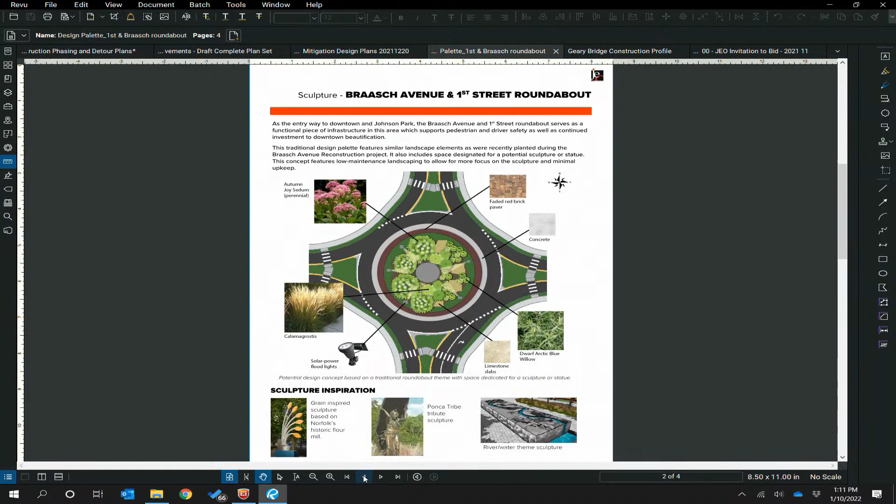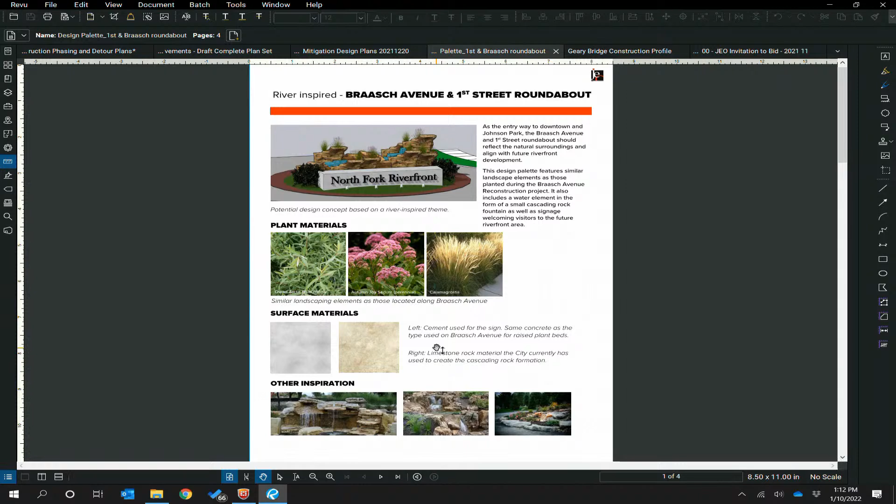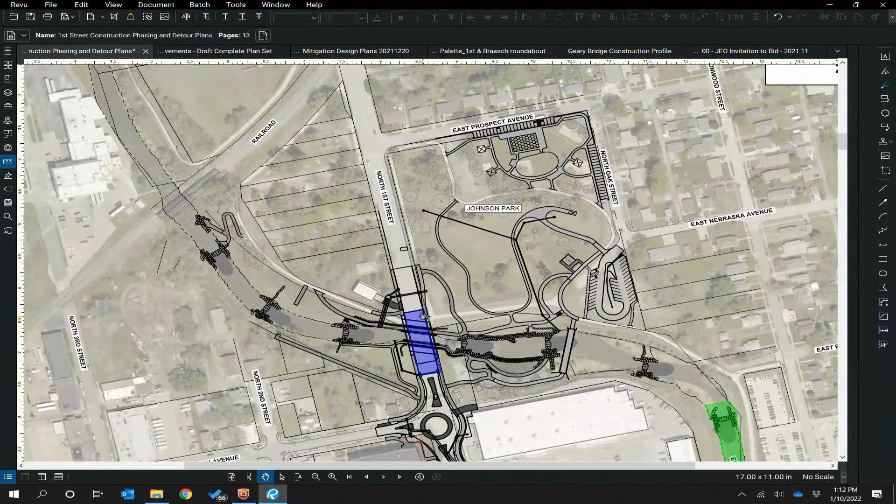So, plants aside, where does this actually narrow from 4 lanes to 2 on the north end, and where on the south end? Just refresh my memory if you would. Yeah, so in a nutshell, on the north end, it really is from Prospect down to the bridge, give or take a little space. So it's not any further north than that. So I would say railroad to the bridge on the north side is where it tapers down, and then on the south side, it occurs south of Norfolk Ave. So the right lane would be a right-only lane, and there would be a single northbound through lane.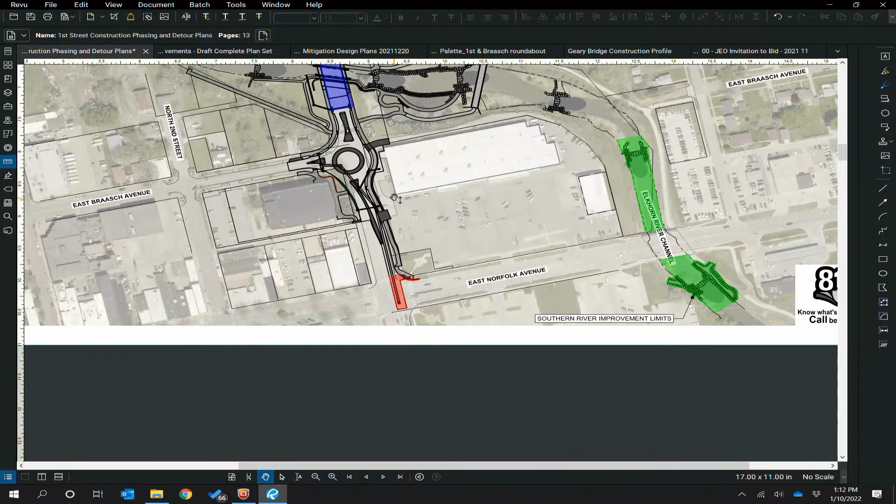That transition, I think, takes place between Madison and Norfolk? Correct. Right. Okay. And the light remains at Madison. At this time, we're not proposing any changes at Madison Avenue.

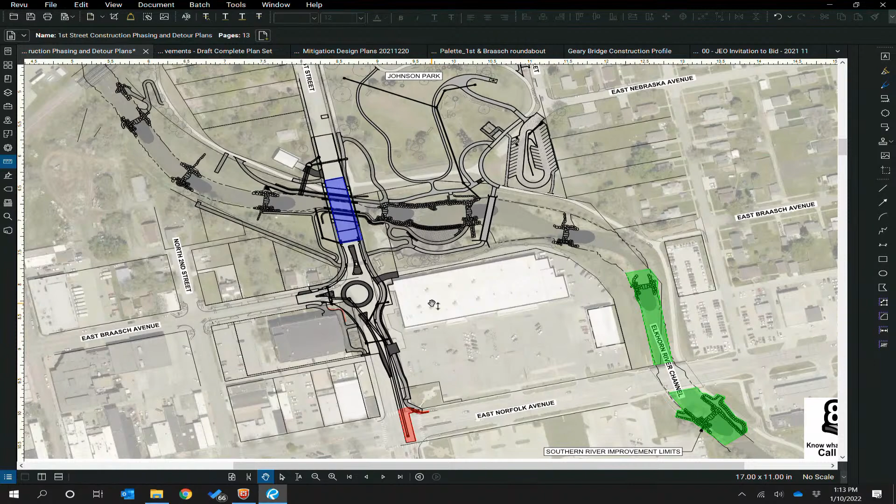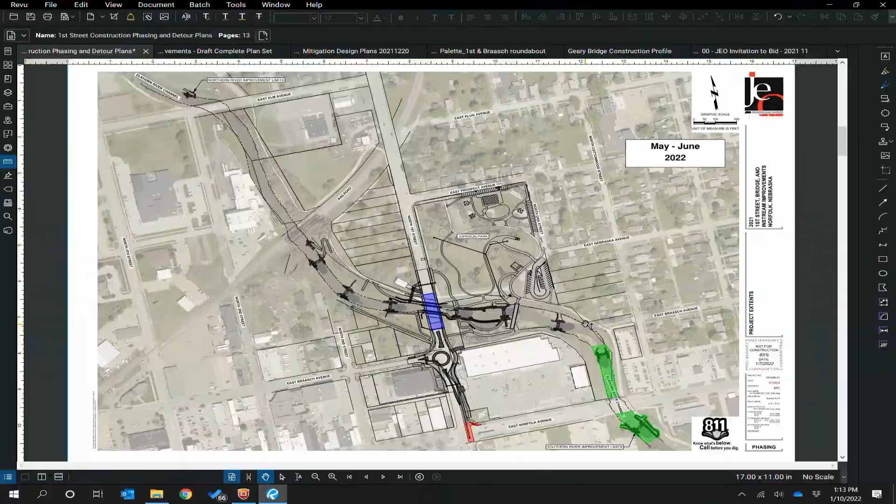So, again, going back, there's a lot of history to this. This discussion and planning started 3-4 years ago. And this question about transitioning from 4 to 2, inclusion of the roundabout, has been discussed significantly. There were requests made for traffic studies, for traffic flow projection. Steve, can you talk a little bit about that? We did a real-time projection of traffic flows given the incorporation of this roundabout.

Yeah. Correct. So we modeled this out, for sure we did a 20-year model on this. And there's no issues with traffic volume. Certainly, what we don't necessarily have an ability to model is how the installation of this is going to change traffic. Something like this will have an impact in terms of changing local traffic as well. But right now at that particular intersection, I believe the number's around 11,000 vehicles a day. That's non-distributed traffic, so both northbound and southbound traffic.

But well within the volume capacities of a single lane roundabout, recognizing that a roundabout doesn't necessarily stop. That's more of a continuous flow versus a signalized intersection that has intermittent stop-start. So your volume capacities at these roundabouts are significantly different than a 4-lane stopped intersection. But it was modeled by potentially one of, if not the leading traffic engineer in the state of Nebraska. He did not have any issues with the installation of a roundabout.